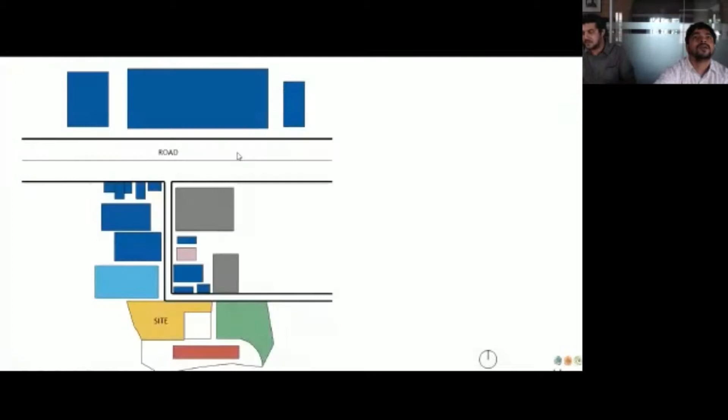So we had this kind of context: to the north of the site, an apartment coming up; to the east, an empty land; to the west, a space which was part of the same property but used like a farmland; and to the south, a go-down, which was a warehouse. Looking at this kind of development happening in the vicinity, we thought it would be a good idea to take an approach which is more of an introvert design, where the building looks inside the space.

So that is how we came about this land. The plot was about 15,000 square feet, out of which we had a space where we were looking at about 10,000 square feet of built-up area.

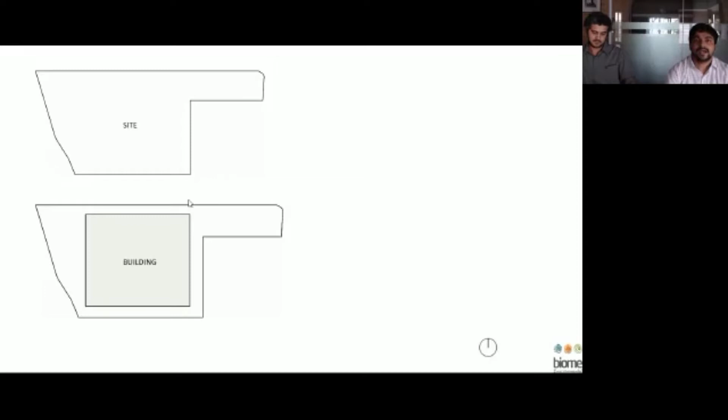The client came up with a brief that they wanted a kindergarten and a primary school. They had an initial school in Guwahati and were now expanding their base towards Bangalore as well. Rhythm, the client, was going to head this school, and had this philosophy he had been studying and working on, called the Reggio Emilia philosophy.

This was developed in a municipal corporation in Italy, in a town called Reggio Emilia. This was post World War II, when the whole community was looking at redeveloping the entire town and how we look at education. So all these aspects, they were completely reinventing how things should happen.

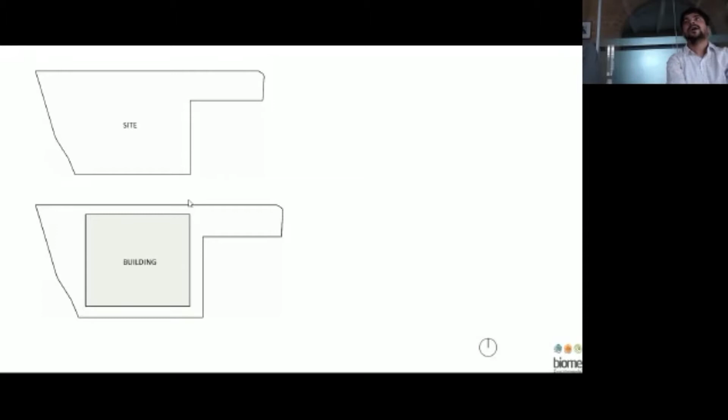The Reggio Emilia philosophy talked about how, as a child's education progresses, there are different contributors to it. It looks at the parents as the first teacher of the student, the teachers who act as collaborators and co-learners, and the peers, where children learn from each other.

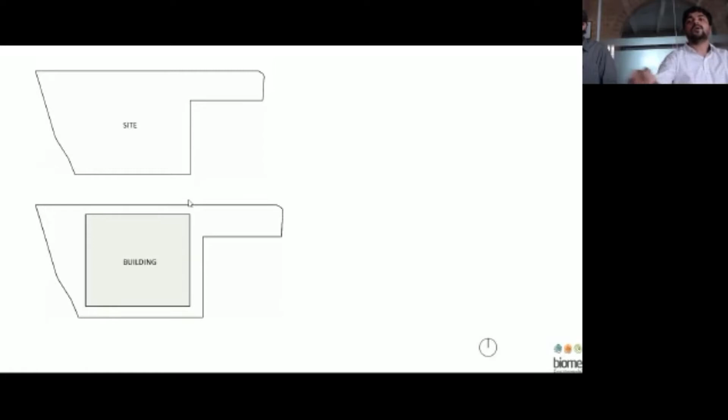These were the three main aspects of the Reggio Emilia philosophy, beyond which it also talks about how environment plays a major role in the development of the kid, so that it becomes their third educator. Kids start learning from the vicinity, from what's going on around them, and they start incorporating all these aspects into the educational system.

Looking at this philosophy, we started working on the project. Along with it, the client's father, who was also the director of the company, had an inclination towards Vastu, and they were very keen on following every minute detail of Vastu in terms of what things should go where. So we had a Vastu consultant on board from the beginning.

The way we looked at it was right from the site's entire topography, how we were going to modify this topography to make sure we were completely compliant with the Vastu. Keeping these things in mind, we had to go with a rectangular footprint.

The location of the administration was to the southwest. The northwest had the toilet block. The entrance was to the northeast with the water body, and we also had the recharge well with the sump tank to hold about 50,000 liters of rainwater to the northeast. The kitchen came into the southeast corner. These were all defined by the Vastu.

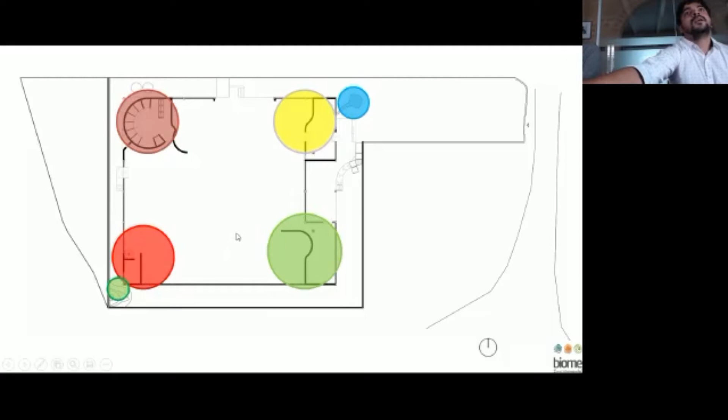Taking cue from this, we also developed how the roof was going to slope, which would slope towards the north and have the highest point to the southwest.

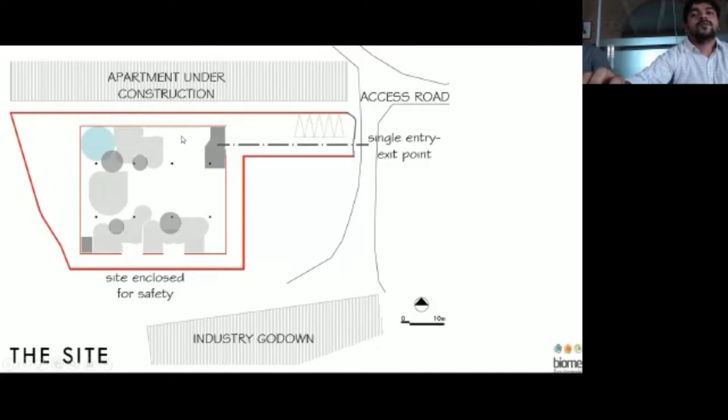Based on these parts, we started developing how we could further develop the internal parts of it, given that we were restricted by the footprint or the complete structure of the building.

Since environment, or overall the community or neighborhood, is a very crucial part in the development of Reggio Emilia philosophy, we took the example of a square or a piazza in a city, and the whole design developed around this piazza. You have the central space which becomes a community area as you enter, and in this public square you have all sorts of interaction between peers, co-learners and students, with every classroom opening into the piazza space.

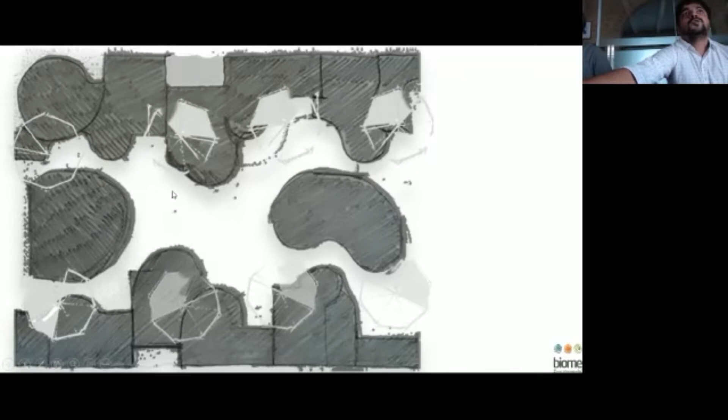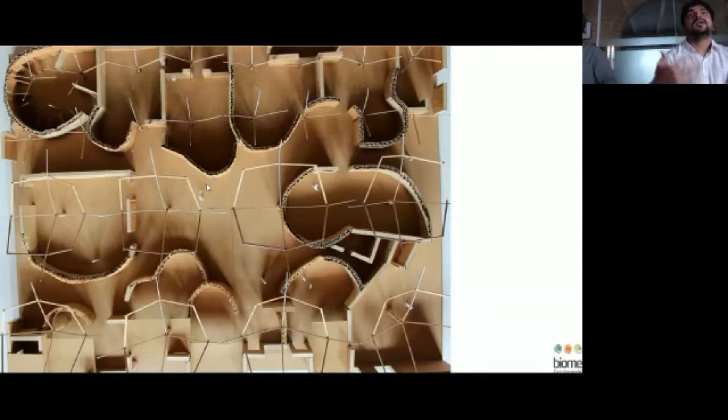The next part we started looking at was the kind of development we were going to have, which was an organic development. The Reggio Emilia philosophy also talks about the fluidity or flexibility in the spaces, the way the teachers or students would like to use them, with that kind of flexibility into their classrooms.

They will have different types of interactions which happen one to one. They will have a circle where everyone is equal and talking about things in group studies. Also, they will have instruction-based studies.

The classrooms were defined to have three types of spaces in each one of them. The initial study was working with all these organic forms, how we can do it. It was also supposed to be in two phases. The first phase was to have 4 classrooms and one early childhood stimulation center.

An early childhood stimulation center is where the kids, who are really toddlers, come in with parents, as parents are the first teachers of every kid. They come in and the educator or collaborator has this kind of interaction going on, so the kid gets familiarized with the school, the environment, and the people coming in. This stimulation center becomes the part where every kid begins the journey in the school.

So we have 4 classrooms happening to the south of the building, and we had an atelier. An atelier is a studio, and this entire school revolves around that studio, the atelier itself.

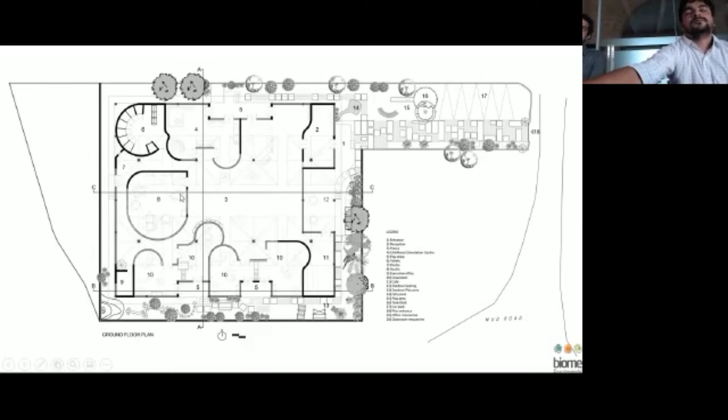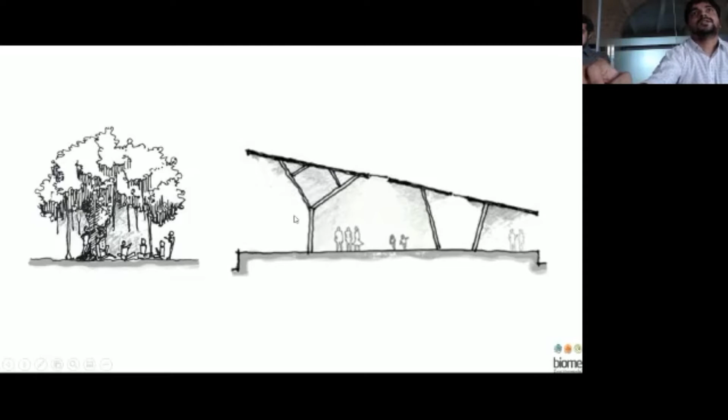The next idea incorporated into the design was about how we look at learning, a kind of curriculum system where kids are learning under a tree, and how we could take that idea and incorporate it into our design, looking at this branching of the structure. The structure of the building was developed based on the tree's branching, and that is how the truss came about.

Given the time frame where we had to quickly finish the project, we started working on design and construction happening in parallel. The structure was designed so it could be built separately in a different location and then brought into the building.

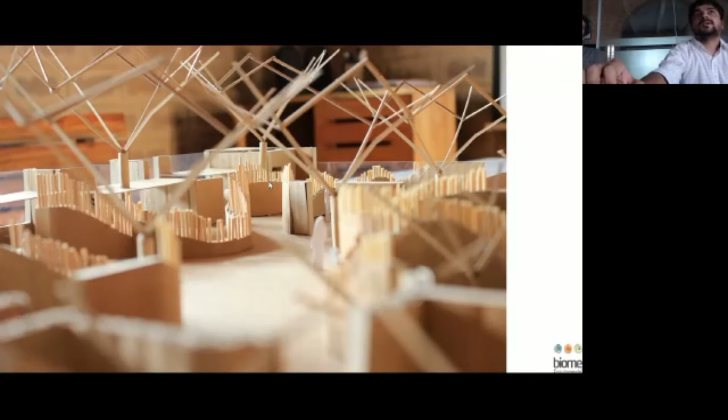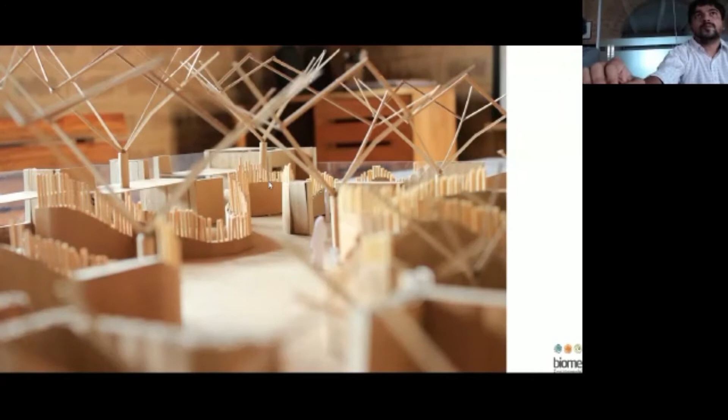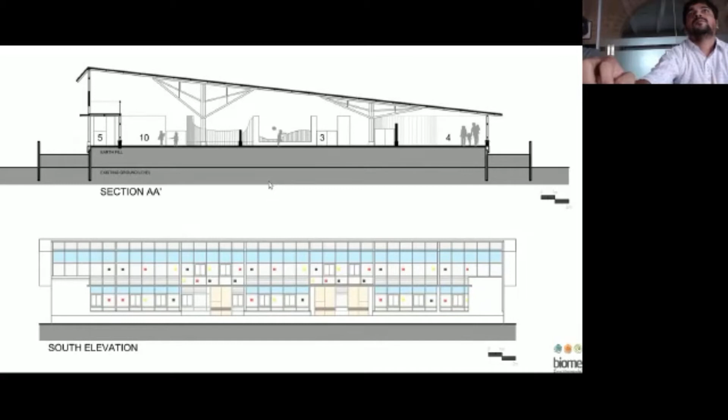The approach of this building was that the walls are separated from the roof, so the walls can happen in parallel while the structure for the roof is also being worked on. We had this entire facade to the south, designed as an assembly with different materials: glass, pine wood, louvers, and perforated sheets.

The choice of fenestration was based on the activity happening at that level. Close to the ground, we had perforated sheets so you get a light breeze over the kids. On the upper level, we had glass to bring in light for working. The mid section, right below the mezzanine, had louvers so the hot air could escape from the upper portion.

The mezzanine spaces were integrated into the design as sleeping spaces for the children, because the school ends around 1-2 p.m., but sometimes kids have to stay until late evening when parents come to pick them up. Each classroom had a shared mezzanine sleeping space where kids could go in the afternoon to rest.

At that same height we also had louvers to bring in air. The mid section from there was made with pine wood, so direct sunlight wouldn't come in while kids were sleeping. The top portion was again done with a perforated sheet, allowing the hot air coming from the roof to escape from the top.

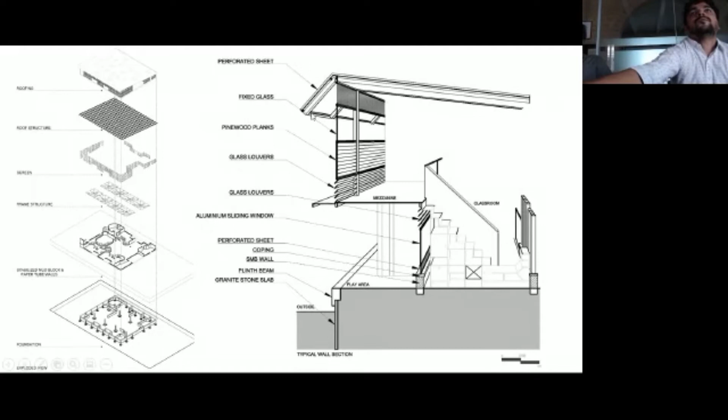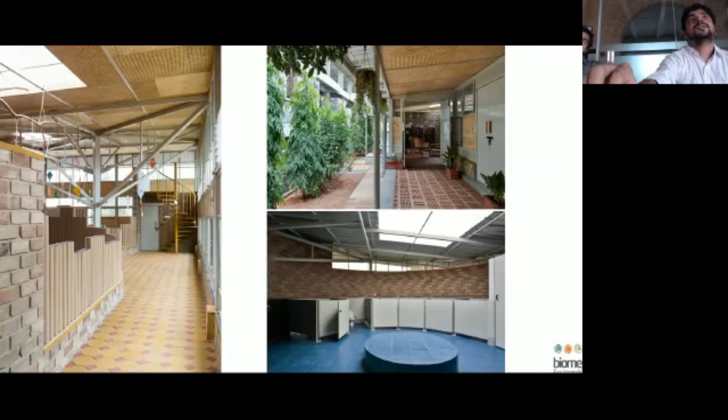So the spaces were, apart from the classrooms themselves, filter spaces and spillover spaces where kids can come out and play in the environment. They can even learn in the environment. The Reggio Emilia philosophy doesn't have specific sets of tools like Montessori schools have, particular equipment with which children learn. But in Reggio Emilia philosophy, kids actually learn from the environment. A stick lying around can become a music instrument or a tool for the kids to play. The trees become part of their learning, so the entire environment becomes part of their curriculum. These spillover spaces give the kids access to external spaces without barriers coming in between.

The paper tubes were used as the division, given the volume of the building was high, but at the same time the scale of the kids, who were the primary users of the school, was going to be a challenge. So we looked at the partitions for the classrooms happening at different levels. The paper tubes used as partition material allowed us to have varying heights, and since they're lightweight, if something falls the kids won't get hurt. This enabled us to use the material in a more fluid and flexible manner.

This was the central space where all the activities happen. The kids have their activity tables and small activity spaces. The idea of using the paper tube went ahead into the furniture design as well, and we looked at paper honeycomb boards for the furniture. The furniture is now so popular with the kids that the kids and teachers themselves start making these furnitures - tables, chairs - and that becomes part of their study or their exercises as well.

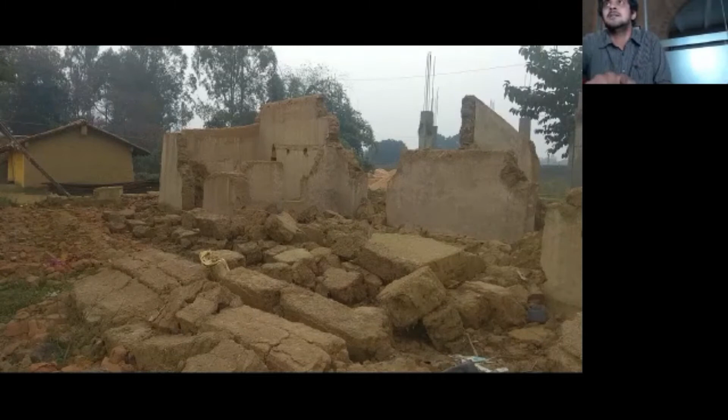So the question asked when we had to design and build Atelier was: after 5 years, is this what we'll be doing, or would it be this? Both these pictures are in Hebbal, construction debris filled on low-lying land - both economic waste and ecological waste. So one asked these questions, quoting from Cradle to Cradle by William McDonough: can the materials you choose to build with, after the useful life cycle of the building, become biological nutrients? For example, this rural home's earth goes back as earth again, non-polluting. Or can it alternately become a technological nutrient, meaning it comes back into building or some sort of productive use?

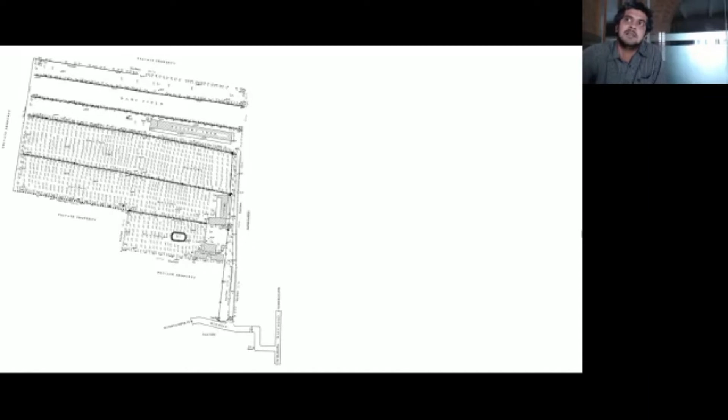So now we'll take you through two past projects. This particular drawing you're seeing on screen is a project - a farmhouse for a couple very close to Yelahanka. The clients are Sushma and Anand. We did this project between 2003 to 2006, I think. It's a 6-acre farm of guava trees. When they came to us, the previous owners had built - you see here - one, two buildings, and then there was this poultry shed.

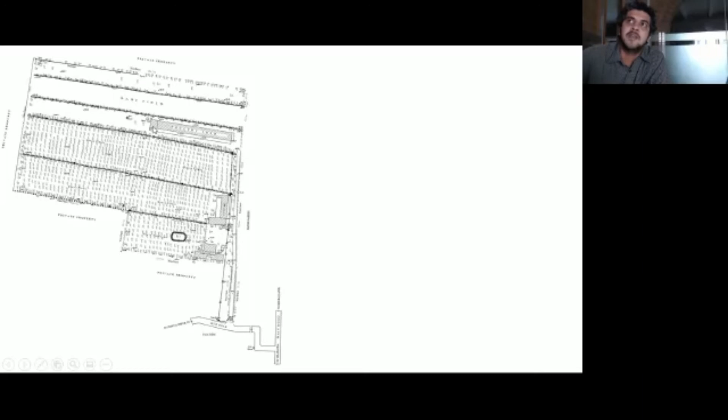So the call we took then, going back one slide, was first the decision of where to build. Now, we did not want to disturb the farm. The poultry farm was not something they wanted to continue, so we decided to build within the footprint of the poultry shed.

We developed this design where at one corner the part of the old structure remains. This portion uses the old foundations, and then we fill in the space between.

The brief required that the family wanted two homes, one for the parents, one for themselves, and spaces where they could work from home. Anand is an entrepreneur, so he wanted a home office, which is this portion here. Sushma was a filmmaker, and she wanted one theater space where she could screen movies. So that's what you see here.

So the whole approach to construction took this: okay, now we've got a lot of material from the old structure. The clients used to have a house in the city which they sold, and a lot of the old windows came from that place. But the material necessary for the walls came from the site, and this is the approach in most of our projects, that you design a basement space which gives you the earth for construction.

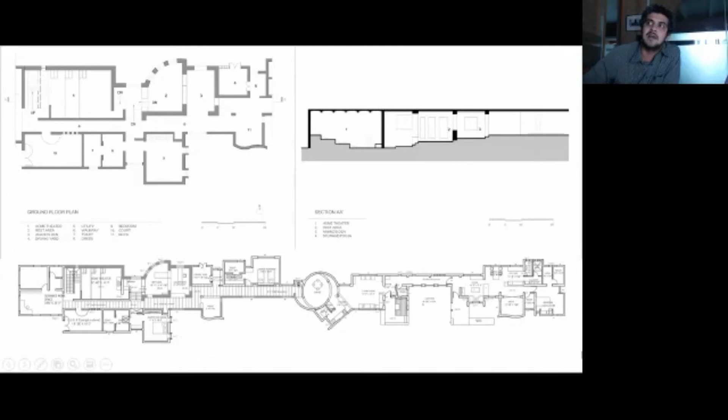But when we look at the inner pictures, I'll take you to the outer pictures first. It's very, how do you put it, quaint for a house, a 270 feet long house. But the clients accepted the idea, they understood it, and they say the children enjoyed the long corridors the most.

Right. So yeah, I mean, this slide should not have been there, but anyways, it's there.

So these are the questions that we ask in our projects: that cities are predatory in the sense that a lot of material comes from the hinterland and from places far away, as far as China, Europe, Africa and Australia, which is largely the world. So what we ask is, can we look at a different possibility where cities are not predatory but are part of the solution, and we look for resources within?

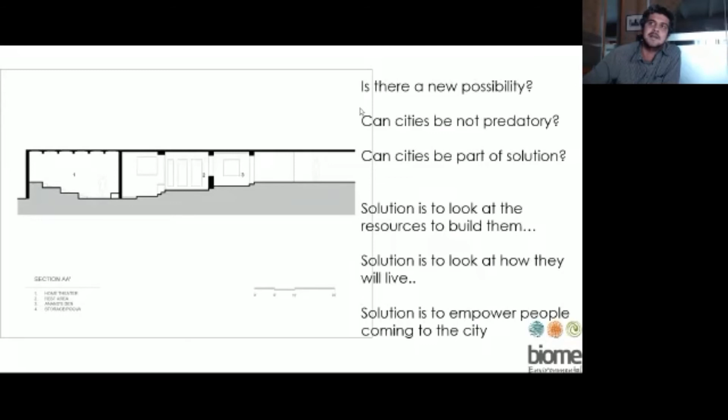So what one says is you look at old buildings themselves as quarries for new material, right? Beyond that, the whole idea of the basement - what you see here is data from 6 houses.

that we've designed. The first 3 have basement spaces, the other 3 don't. So what we also call this process is a collaborative, cooperative process of design. Us being architects doing multiple projects in the same city are now aware of some client needing a basement and having a functional use for it, but others can't have a basement for whatever reason. But you can create these linkages.

So what happens is, in Mini's site for example, the basement yielded 149 cubic meters of soil, whereas what is needed is 55. So we connect them to, let's say in this instance, Uma's house, where she gets the soil. So they are all not too far from one another, these projects.

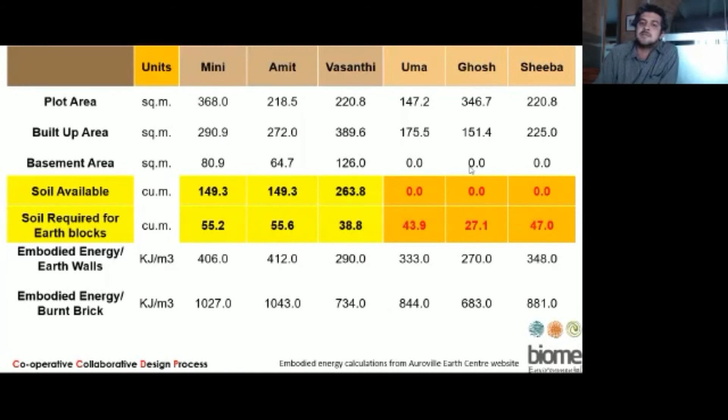So if you can't have a basement space, can you create the linkages as architects? Can our role expand to larger than just making a design, but create these connections and create a collaborative process? Right, so that's one of the things.

It started with a 2-room unit in the front. The family expanded, and as their needs increased, they kept adding more and more. So over time, the house stopped meeting their functional requirements and also had a few structural issues.

So when we came into the project, Mr. Raghavan had this clause that no material from my plot should go out as waste and pollute elsewhere. So we were put forth with this certain challenge that we had to use almost everything.

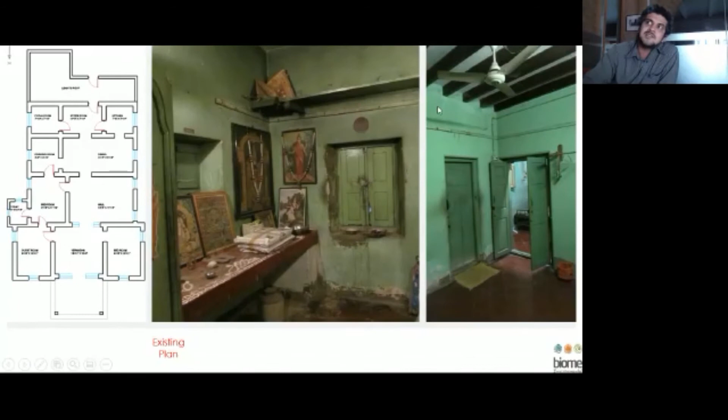So what happens now is that you have to look at this project with a different lens. So this was the house and some pictures as it existed. You see Madras terrace roof, teakwood beams, old doors, right?

So we proposed as per their new requirements. So they wanted 2 homes. Mr. Raghavan wanted 1 home for each of his daughters. But what happens is the whole process of taking down the old structure moves from being a demolition to a dismantling of the house.

There is concrete which has come again from the roofs. The steel, we harvested it, but this was old steel and our engineers did not accept it, but we got a monetary value and that went out for recycling. And similarly, the other waste like surki and the foundation came out as stone.

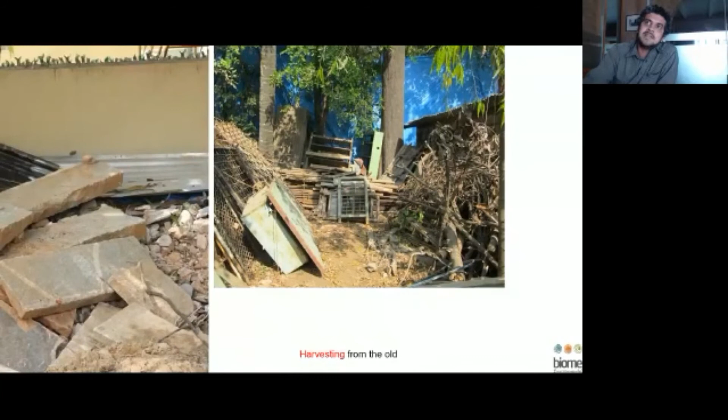You had the wood, the steel. So all these were separated at source, if you would call it that.

Beyond that, this had to be processed. Now the concrete had to be broken down into smaller aggregates. So this was a particular challenge. We did explore setting up small crushers, but it was prohibitively expensive, and setting it up in the heart of the city was not a proposition one could go ahead with. So all this had to be manually done, right?

And then one also came across another challenge, which was weak soil. So we were lucky with this, that we had access to good engineers who knew alternates of construction. So Professor Yogananda, Dr. Venkatesh and Pramod, they came up with this solution that you can now make wells.

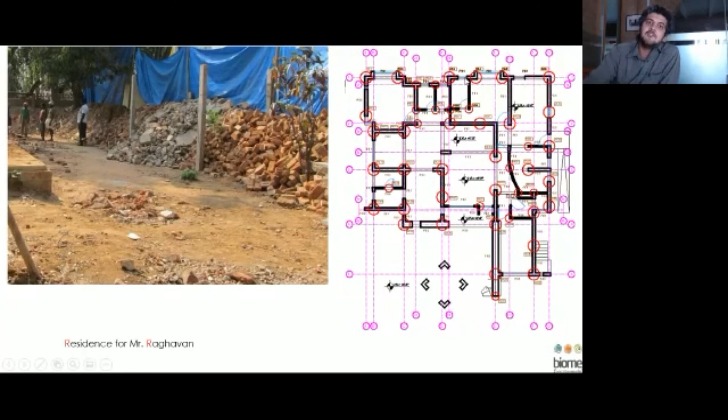So the red circles you see here are all dug wells, a kind of pile foundation. So this is the picture you see of construction. You see the processed aggregate now created here. So using this, we create new concrete and pour it into these wells and lay a grade beam over it.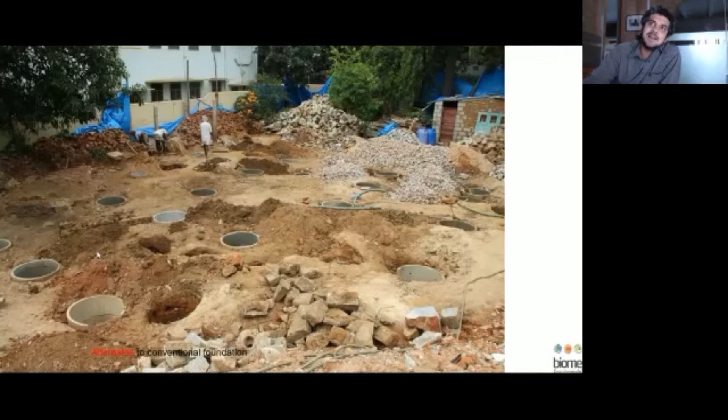and that takes the structure above ground. So that's pretty much the process. Once you concrete, you get that, you cast the beam. So also what happens is you have to now think on the go. The old house, because it had smaller spans, and I think they had done sand piling as well, used a stone foundation.

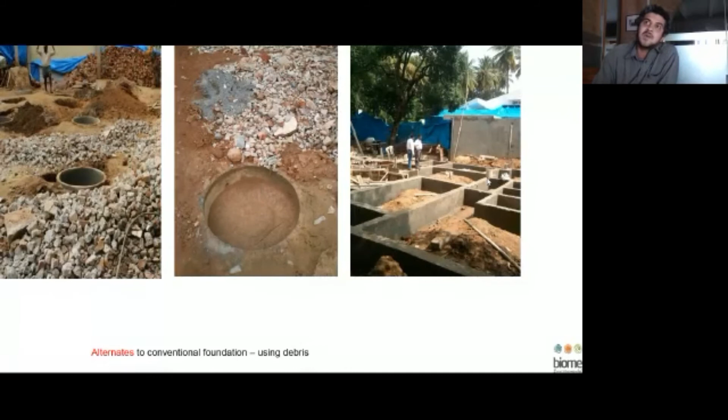But now here you had concrete as debris, which is coming up. So now that goes in as foundation. So the old foundation is now the walls for the house that you see.

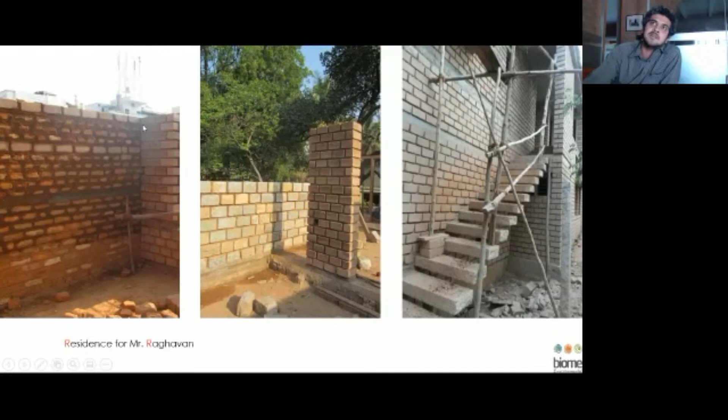In the facade, you have the stone wall, which used to be the foundation of the house. The stone ties which are in the foundation is the new staircase. You see part of it here. These are the old bricks, which have been reused again in this building.

It's a lot better now, but in our earlier projects, we would collect plastic in the neighborhood and it goes down and it's in a foundation. So as long as the building stands, the plastic is there, non-polluting.

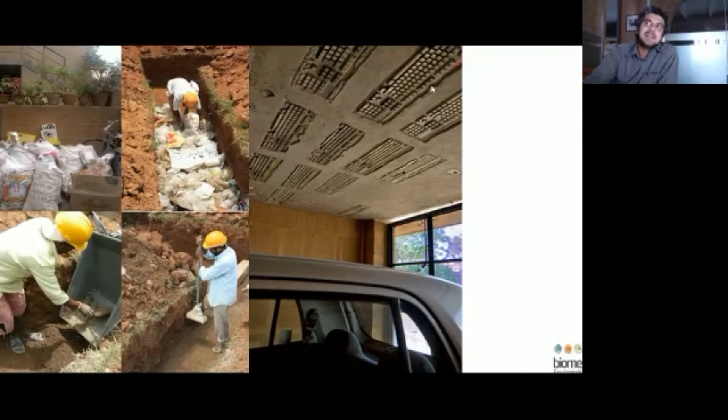One picture of a filler slab of computer keyboards, which is before e-recycling came in as a concept. And also the linkages we had spoken of, connecting people with basements to people without basements. So you can apply the same thing.

So these two projects sort of got us thinking that if Atelier is to be taken down, do we really go this way? Because we also would have observed through Raghavan's that it's a lot of work, a lot of effort to reprocess material. So we asked this question when we had to design Atelier: do we go down that way?

So Anurag will continue from this point. Taking this as a challenge or a starting point for the design, we started looking at every component of the building from the perspective of what happens to this component at the end of its life, the end of the building's life. Can we look at a building that can later just get disassembled and then used for a new structure, or a structure which is exactly the same in a different location? Can you pick it up and plonk it in a different location?

So we started with the foundation, how we can explore different types of foundations and the plinth beams. So we came up with this idea of using the chapdi stone, which is the stone slab available in Bangalore, if we can make use of it in the plinth beam.

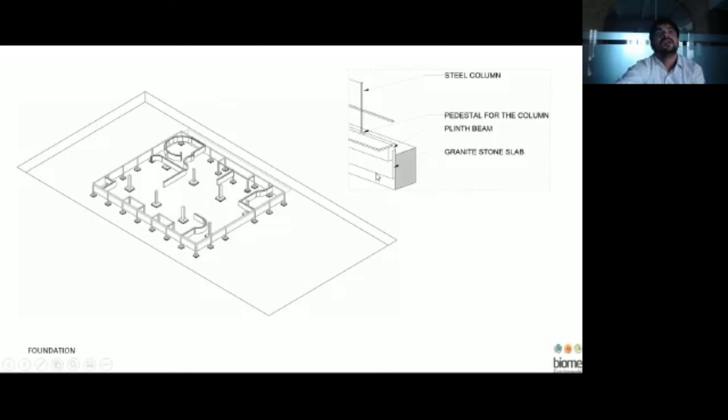So at the end of the building's life, you remove the soil inside, the soil filling what you have, and the chapdi stone will come as it is. So you can use it as a new material itself, like what we saw in the example of Sushma's house or even in Raghavan's house.

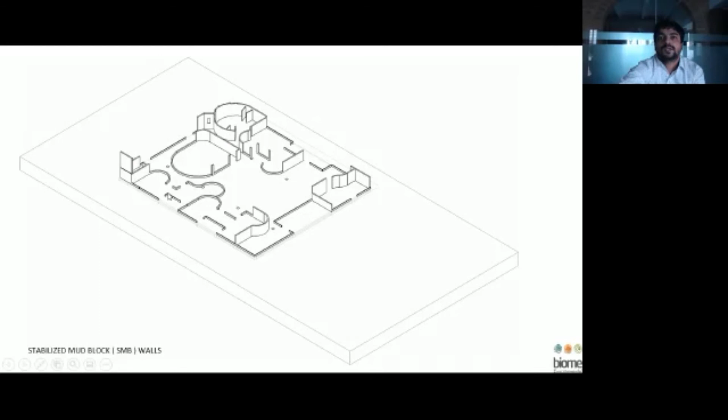So the walls, the way we were looking at it, we restricted the use of mud blocks in the structure to a bare minimum, just to ensure that the paper tubes, which we were using and which were tied together as an assembly, are not coming in contact with water when they're mopping the floor and some water spills onto the floor. So the walls were restricted only to a space where you wanted that gap between the paper tubes and the floor.

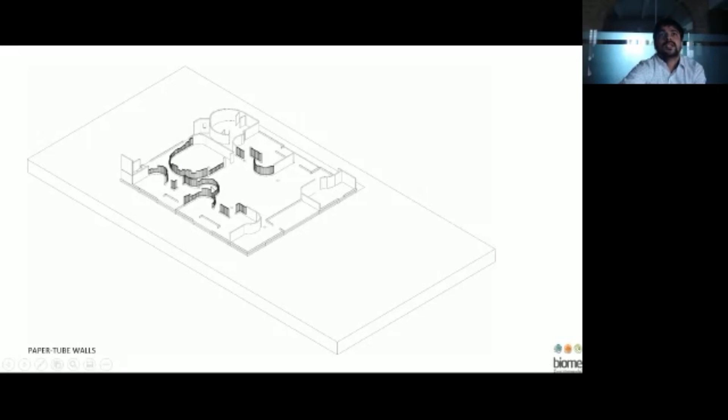The paper tubes were tied together with nuts and bolts, and at the bottom they were fixed with a metal assembly. So you could take each paper tube out and it would turn into a panel. You remove the screws and nut bolts, and you can use either the paper tube or the entire panel in a different location.

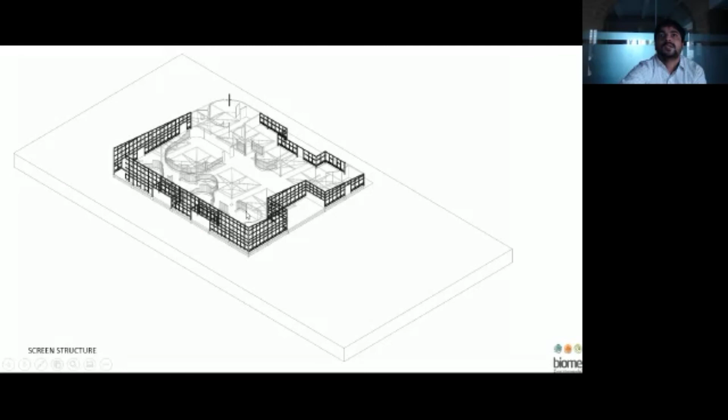The facade was again designed in a modular way. The structure on the external face, the entire enclosure or envelope, was made with smaller modules welded together with a single weld. That way, when you remove it, you can remove it with a single hit of a hammer, so you don't have to do gas cutting, which would lose the complete length of the member. This kind of construction approach was part of the entire thinking process.

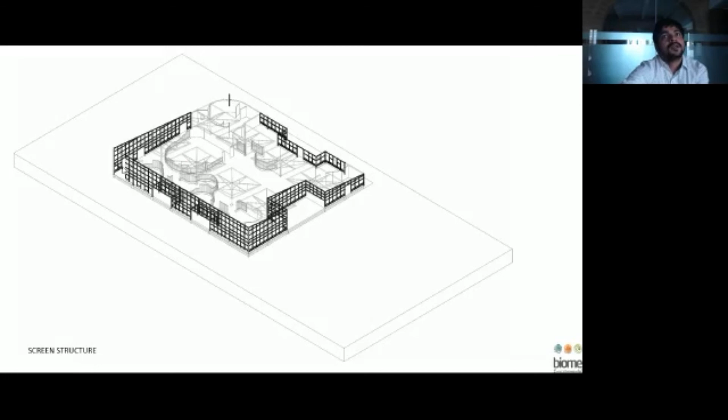So you have these envelopes coming in. The tree structures were themselves designed. The entire roof was held together by these 8 tree structures, which were metal tree structures. These structures supported the roof, and then the purlins for the roof came in.

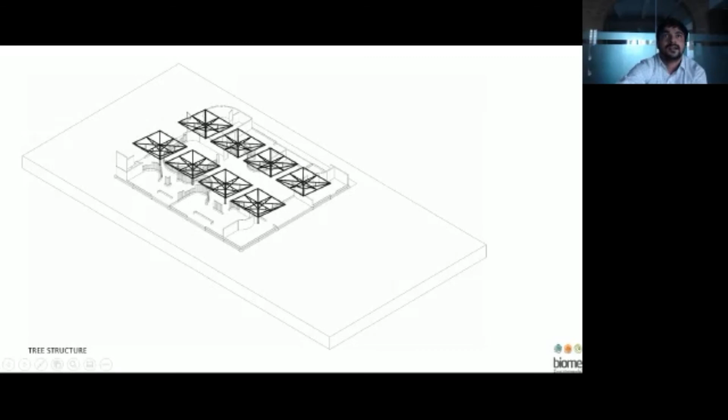The assembly was also made in a way that it was a prefabricated A-frame. Every frame was fixed to the central arm, the main column, with a nut bolt assembly. At the end of the life, you remove the bolts and you can use the entire A-frame for your purpose. The central column remains without structural damage since you are not cutting it, so you can use it as a structural member in future.

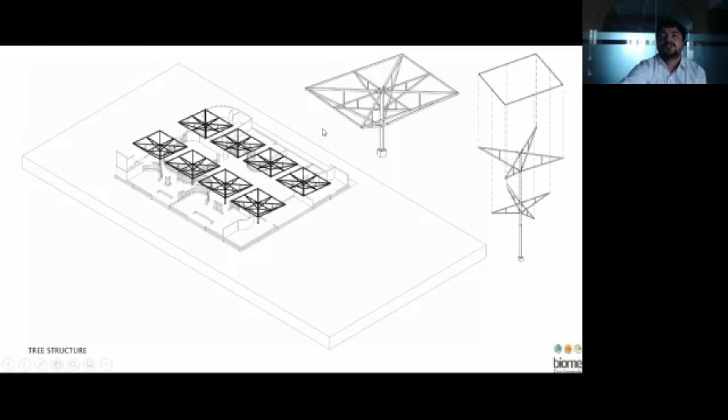So you don't have to go through recycling, because while you can recycle steel, when you do, its structural integrity is harmed and you can't use it as a structural member in future. This way, when you remove the nuts and bolts, the member remains intact and you can use it in different ways.

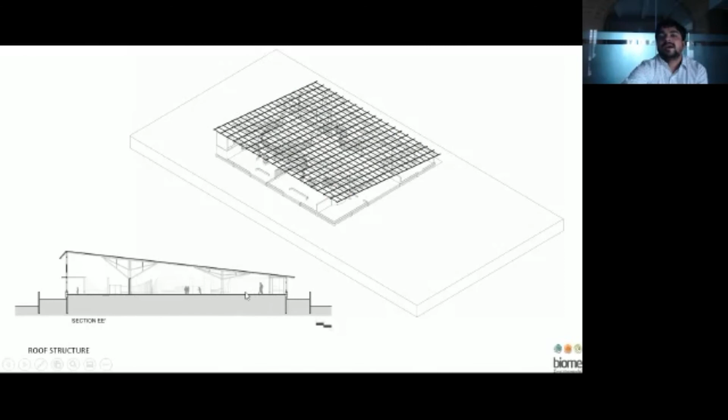The facade came with pine wood panels, which were packaging woods, and that became a kind of module for use. The roof was fixed with bamboo ply, and these bamboo plies were also used. The assembly was done only with screws, so you remove it and even the roof comes off completely. That way, every component from the roof till the foundation could be removed and dismantled, and reused as it is when the building's life comes to an end after 5 years.

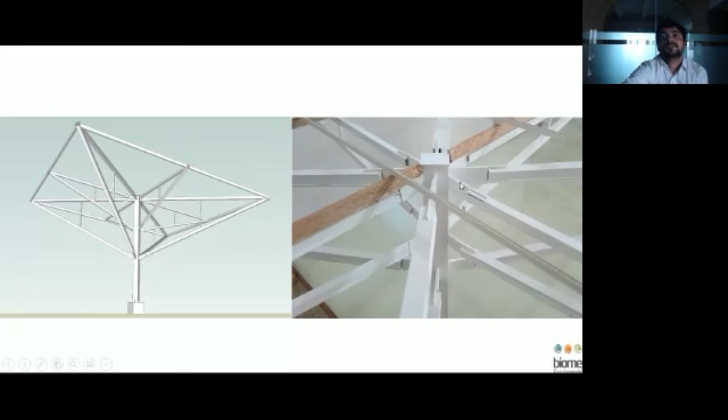But yeah, so that is how it works. While you have these kinds of ideas going on, you also have to see how you can make it work, and you need to work further on the joinery details. As part of the design process, you need to work out every junction, how it comes together and where each member fixes, because most components are prefabricated, so they can happen in parallel and be removed easily. These joineries were worked out in the office so we could be sure of the kind of junctions we'd get at every point, and that is how the entire structure came about.

Thank you. Thank you for that wonderful journey of taking us through those three projects and the whole storyline of how we can get into a circular economy of materials.